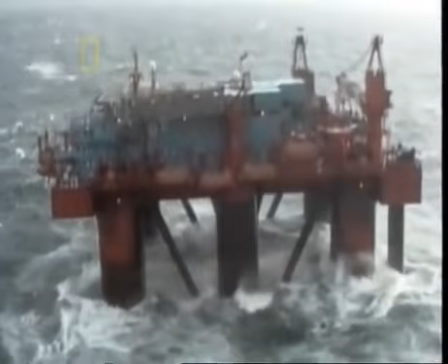Can massive oil rigs survive monster storms to find the fuel? And can mega shipyards build the new rigs fast enough to keep pace with exploding demand?

The world is desperate for energy. Every day we consume more than 80 million barrels of oil and more than 7 billion cubic meters of natural gas.

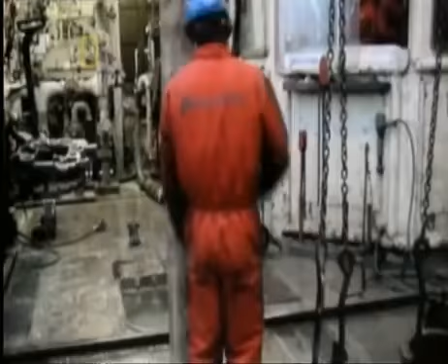But oil and gas are getting harder to find, and new discoveries are smaller than they used to be. It's a crisis, forcing energy companies to search in some of the most treacherous places on the planet.

Like the North Sea, a patch of rotten weather that lies between the British Isles and Scandinavia. For thousands of years, the North Sea has been feared for its storms. Here, 25-meter waves have been measured.

So drilling for oil or natural gas here is nearly impossible. But buried beneath the North Sea are 15 billion barrels of oil and 5 trillion cubic meters of natural gas, so it's worth any sacrifice to go after it.

And to get to those reserves, it takes a mega-structure oil rig. A rig like this one, the Noble Pete. This 9,700-ton monster can drill wells more than 7 kilometers beneath the sea floor.

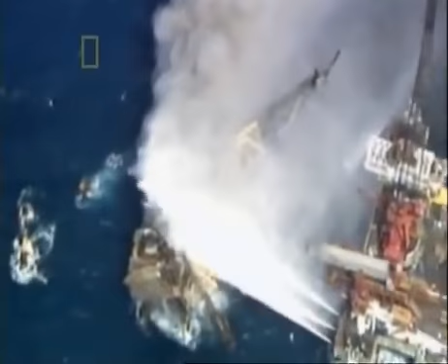Its heavily reinforced hull and legs are designed especially for harsh environments like this. Every bit of this armor is needed, because this corner of the Atlantic is literally a killer. Since 1980, more than 350 North Sea oil and gas workers have lost their lives.

Explosion and fire on the Piper platform. It's a grim statistic every rig worker knows. Like these guys, suiting up for their next 2-week shift.

They're in the town of Den Helder on the coast of the Netherlands, about to travel 150 kilometers over the frigid waters of the North Sea to work on the Noble Pete oil rig. And you thought you had a tough commute.

Rig workers have to wear state-of-the-art survival suits that retain body heat. A helicopter crash in winter would send them plunging into near-freezing water. Unprotected, they would be unconscious within 30 minutes and dead within an hour.

Helicopter accidents, though rare, are an occupational hazard. In the last 20 years, more than 60 rig workers have died when their choppers crashed into the North Sea. It's a hard fact to stomach, and they've got plenty of time to think about it.

The ride takes over an hour. But as the rig appears, like an island in the middle of the sea, thoughts turn to the hard work ahead. The Noble Pete is about to start a new mission, drilling to tap a reservoir of natural gas worth almost $350 million.

This oil rig is a specialized petroleum predator, perfectly adapted for its mission, to travel the oceans of the world and drill for precious oil and gas deposits buried miles below the sea floor.

Housed in a 45-meter tower known as a derrick, the drill digs a shaft to pockets of oil and gas trapped in layers of rock. But the drill needs everything else on the rig to support its work.

Up to 80 people are needed to run the operation, so there are 4 floors of living quarters. Below that, the steel hull is crammed with equipment, including 6 1,200-horsepower diesel engines that generate the juice to keep the drill running and the lights on 24/7.

The operation costs over $55,000 a day to run, so anytime the drill stops, they're hemorrhaging cash. That's why the rig and its workers are pushed to their limits.

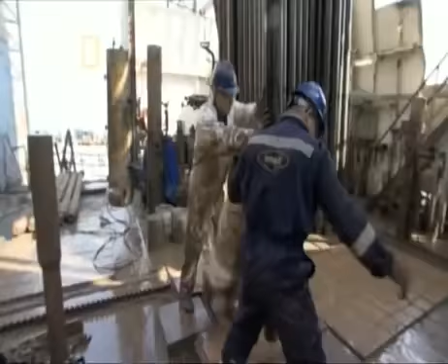Workers put in grueling 12-hour shifts for 2 weeks straight. Then they are helicoptered off the rig for 2 weeks of R&R. Every job here holds hidden dangers: crushed hands, broken bones, and even death.

The risks are high, but so is the money. Salaries up to $100,000 for 6 months' work. And that draws workers from all over: Lithuania, Malta, Portugal, Norway, France. 9 countries in all. They earn every penny.

Because this megastructure never stops working. But even if they strike the mother lode, it won't be enough. In fact, all the oil rigs working the oceans of the world, and there are more than 500 of them, can't satisfy global demand. So companies are racing to build more rigs as fast as possible. But building them calls for another kind of megastructure: the giant shipyards that can mass produce these maritime monsters.

One such shipyard is in Southeast Asia, near the western end of Singapore. Called the Keppel FELS Pioneer Shipyard, it's building more mega oil rigs than anywhere else in the world.

Some shipyards have just a few hundred workers, but here, 4,000 people report for work each day.

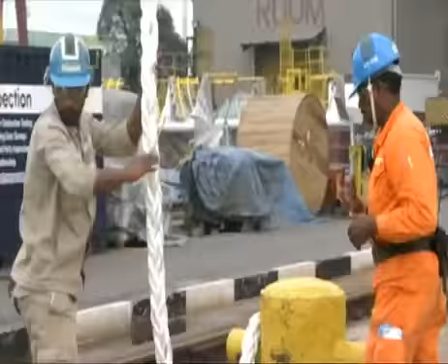It's as big as 38 football fields, stretching over 69 acres, and its only product is massive oil rigs. This gargantuan dry dock is as big as 24 Olympic swimming pools.

Right now, this Singapore-based company, Keppel FELS, is building almost half of all the world's new oil rigs. To hang on to their market share, they've got a bold strategy.

During the good times, we try to build as many rigs as we can. They know that when fuel prices skyrocket, they can sell as many of these as they can make. But they've got to build them fast before the market cools.

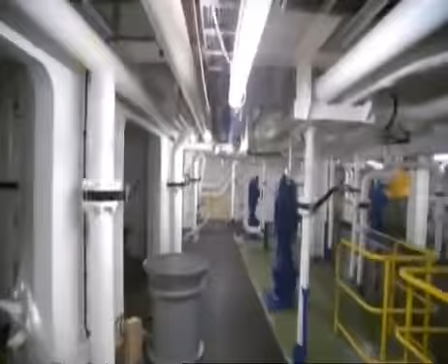A typical shipyard builds 1 or 2 rigs at a time, but this mega shipyard is designing, engineering and building an incredible 23 oil rigs at once. They cost between $130 and $450 million apiece, and the customers all want them yesterday. Multiply that by 23 rigs and you have literally billions of dollars worth of time and money pressure.

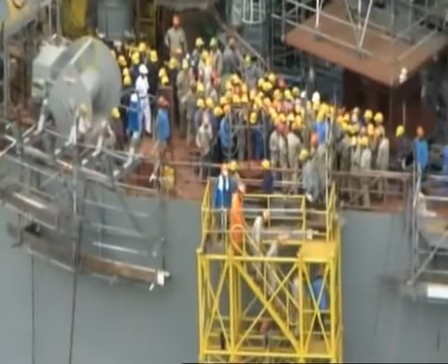One mistake that leads to disaster could cripple the company and delight their competitors. Shipyards from Mississippi to South Korea would love to snatch away Keppel FELS' business. They're the leader of the pack, so they have the most to lose.

But this Singaporean company has an edge: more than 35 years of experience building rigs in tropical heat and humidity.

Tropical heat also describes the way these rigs are made. When you're building 23 rigs at a fever pitch, any slip-up could shatter the production schedule. So the company has spent decades eliminating inefficiencies in their production methods.

We try to innovate our processes in construction and so on, so that we can build better, safer, cheaper, and faster. To speed up the process, they first build the entire rig in cyberspace. The engineering team works with a state-of-the-art marine architecture program.

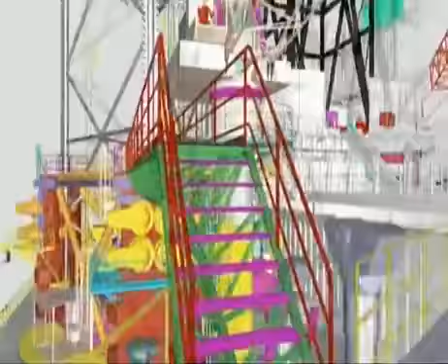This is the design for a new state-of-the-art oil rig: 69 meters long, with 158-meter legs and up to 5 decks of living quarters to house 112 men. It's one of an advanced, super-efficient new generation of rig. It will drill deeper and faster than the older rigs, but the design is still a work in progress.

The engineering team is inspecting their plan for an area below the derrick, and they've just caught a mistake: a pipe is running where a door will bash into it. It would be disastrous if they actually built it this way. Here, they fix it with a simple click of a mouse.

Once the team completes troubleshooting the design, computers will guide every phase of construction as they turn the design into a reality. That will take 18 months, if they manage to stay on their breakneck schedule.

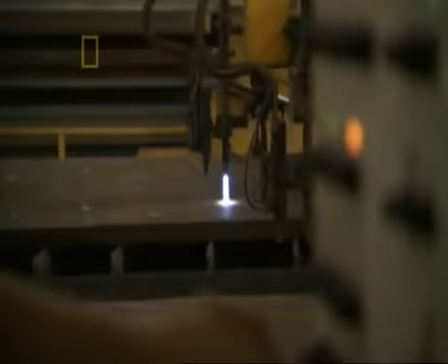First, steel plates are cut to precise size and shape. Each cut is controlled by a computer, using data from the design software. The software also helps generate the shop drawings workers use at every step of the building.

Constructing the rig is like putting together a jigsaw puzzle, except this puzzle is enormous. It's made from 25,000 pieces of steel, and 100 lives will depend on how well they fit together.

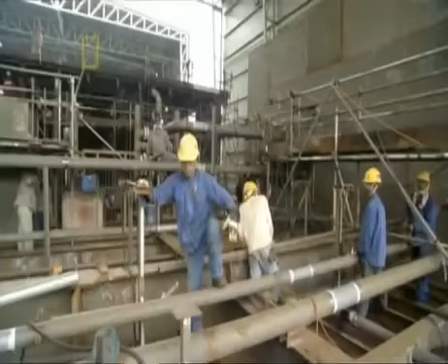Even with methods this efficient and 800 workers devoted to this one rig, it still takes 6 months to go from cutting individual steel plates to finishing huge sections of the rig.

This section is a part of the hull where giant pumps will be housed. It's as big as a locomotive, 20 meters long and more than 55 tons.

When huge sections of the rig are finished, they're moved to the dry dock, where they are stacked and welded one after another, until the rig starts to take on its final shape.

So far, construction is on schedule, but next comes the hard, tricky part: navigating it out of the dry dock and into open water. And this megastructure is still half a year from being finished and joining the worldwide fleet that's desperately drilling for oil and gas.

Back in the North Sea, the Noble Pete has been hired by a French gas company to drill a new well. But this time it must literally mount and drill through what's called a permanent platform.

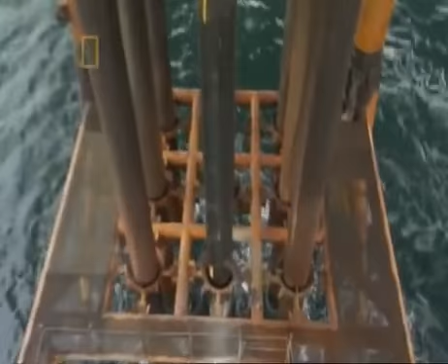This platform already has a number of working wells connected to pipelines sending the fuel to shore. But now it needs a new well, and it can't drill one on its own. That's why it needs a drilling rig like the Noble Pete.

Many rigs can't handle this job, but the Noble Pete can, because it can actually raise itself more than 7 stories above the sea.

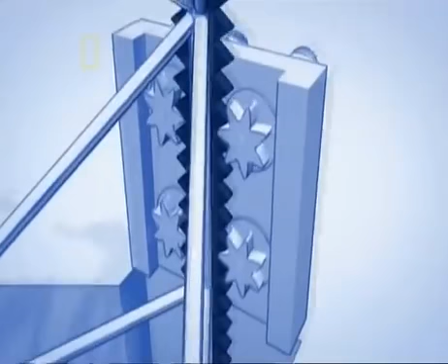Huge electric motors turn massive gears that lift the entire hull out of the water, jacking it up into the sky. Called jack-up rigs, they can position themselves over permanent platforms for drilling. It sounds easy, like jacking up a car, but lifting this massive rig is the equivalent of jacking up 7,000 cars, while balancing on stilts in the middle of the ocean.

Dutch barge engineer Paul Kroner has reason to be nervous. He's about to jack up the Noble Pete. Stand by for jacking. 36 electric motors, 12 on each leg, slowly turn the giant steel gears. To avoid a jam, rig workers slather grease where the gears will climb. One stuck gear could halt this mission before it even starts. Gradually, the rig begins to lift.

60 tense minutes later, the rig reaches its apex 26 meters above the water. But it's still not ready to drill. The Pete's drilling derrick needs to be slid out over the top of the permanent platform on a huge movable arm.

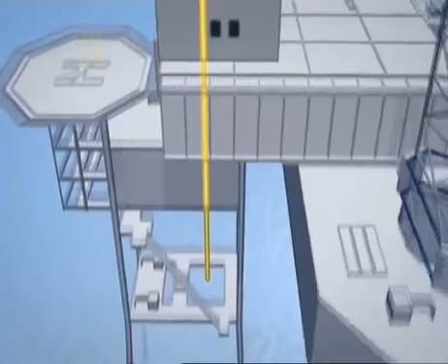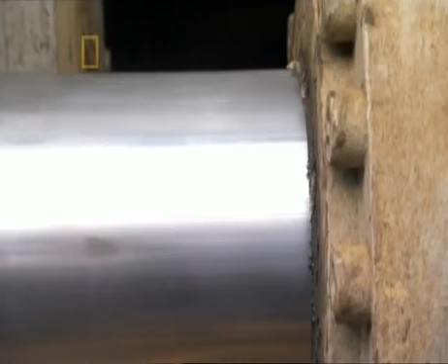Then the drill can be sent through a hole in the platform and down into the seabed. It's up to the Dutch drilling expert, Dennis Sellen, to execute this move. He activates 4 massive pistons that slowly begin pushing the 840-ton arm out over the permanent platform. Each piston is powerful enough to move 6 bulldozers, so powerful in fact that they all must be closely monitored. Going all right? Yeah, starboard side ready.

All 4 pistons must push together so the arm moves straight ahead. If one piston goes faster than the others, the arm would jump its track, bringing the operation to a dead halt. It takes more than an hour, but at last the arm is in position. And this megastructure is ready to drill a new well.

But even though scientists have told them where to drill, grinding through miles of rock to find a reservoir of natural gas will take at least 8 weeks, if they can find it at all. And the crew of the Noble Pete will have to stay on high alert as they drill, because accidents and death threaten every rig worker in the North Sea.

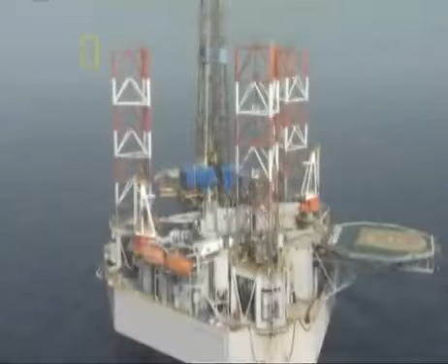When this megastructure oil rig in the North Sea isn't drilling, it's losing $55,000 a day. But even though it's in position to drill, drilling hasn't begun yet. That's because the Noble Pete's roughnecks, the workers who actually man the drill, must still haul more than 500 lengths of pipe from the main deck up to the derrick.

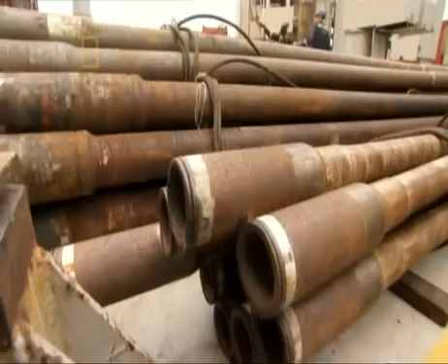This drilling pipe will get shoved into the earth a piece at a time for miles. Each section is 10 meters long and weighs almost half a ton. So this is a big job. It takes a winch and plenty of roughneck muscle to haul these pipes up into the derrick and onto the drill floor where the drilling takes place.

The drill floor is one of the most dangerous places aboard a rig, and it's drilling chief Tony Wiltshire's job to make sure that everyone stays alert and safe. Make sure that this valve is okay, because it's a safety valve we might need it in case of emergency. Here, a careless worker could find himself on the wrong end of a swinging pipe.

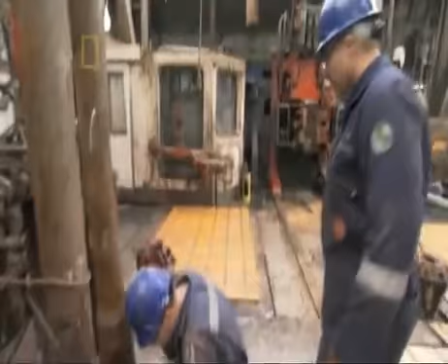Though Tony's concerned about safety, he's also worried about speed. In drilling, you always talk about economics: how faster it goes, how better it is. To work more efficiently, the roughnecks join 3 pipe segments together ahead of time and stack them in the corner of the drill floor. Once they've stacked them all, they're finally ready to drill.

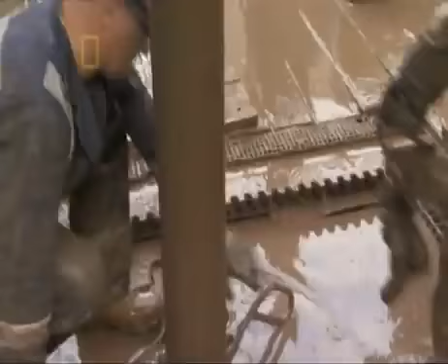Now it's time for this rig to start making money, they hope. There's no guarantee that this well will strike any oil or gas. In fact, in remote areas, half of all drilled wells strike nothing at all. To improve his odds, Tony's assembled a very experienced crew of roughnecks, led by Maltese driller Noel Shembry. But Tony's team has their work cut out for them.

The client, Gaz de France, thinks they've located a new reservoir of natural gas almost 3 miles beneath the sea floor. But to get to it, the crew will have to drill at an angle through 40 layers of rock. By adding or removing weight from the drill pipe, Noel can control the direction of the drill bit. Under such immense weight, even steel pipe becomes flexible. But Noel needs to be careful, because the rock is littered with high-pressure pockets of seawater.

If the drill nicks one, the high-pressure water could flood back up the hole with such force that it could destroy the well or even damage the rig itself. So Noel will have to thread the drill between these pockets like a needle, a needle that's miles away that he can't see. He has to trust his instruments and his equipment: a $30,000 diamond-tipped drill bit and a 1,000 horsepower engine capable of rotating almost 700 tons of pipe.

Noel sends the drill bit down the hole to the ocean floor. Soon it will start to chip away at the rock below, burrowing a shaft towards the gas reservoir. When one length of the pipe has been pushed down the hole, the roughnecks connect another. This process continues until, hopefully, they hit their target.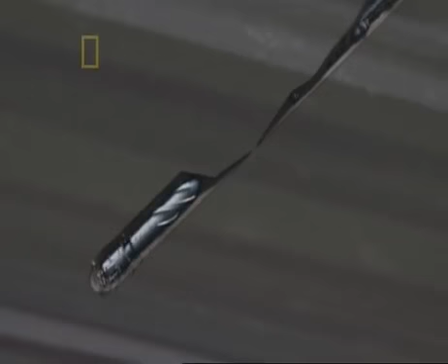It will take at least 8 weeks, if everything goes right, and the driller needs to keep a vigilant watch over his gauges the entire time. A pressure drop or change in drill speed could indicate impending disaster: a cave-in. During a cave-in, the walls of the hole collapse, destroying the well and trapping the drill bit thousands of meters below the surface. But drillers have an unlikely secret weapon to defend against cave-ins: mud.

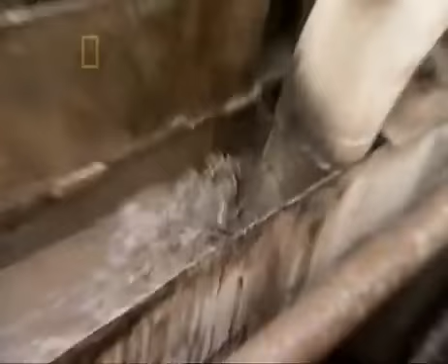On the drill floor, mud is everywhere. But this mud has no dirt in it, and it doesn't come from the sea floor. It's actually a sophisticated blend of chemicals pumped into the well to lubricate and cool the drill bit. The mud also performs another function: its weight pushes out against the walls of the hole, helping to prevent cave-ins. Every type of rock that the drill passes through may need a different mixture of mud. Use the wrong blend and you could ruin a drill bit or destroy the well itself.

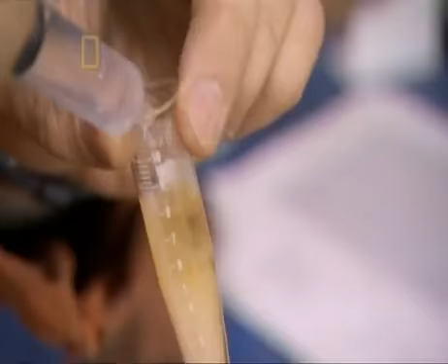So mud engineer Matthew Schofield can't afford mistakes. In his lab, deep within the bowels of the rig's hull, Matthew tests and retests his mud mixture until he finds the perfect recipe. Then roughnecks churn out more than 500,000 litres of the stuff, enough to fill 6 swimming pools.

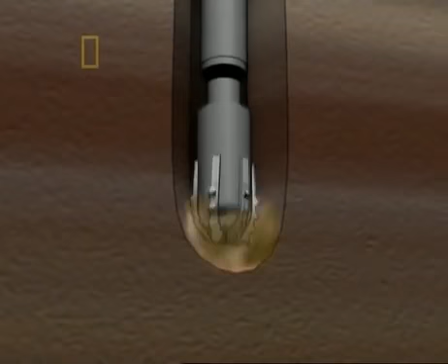Like the blood in your body, mud is pumped through an elaborate circulatory system in the oil rig. Three giant pumps in the rig's hull first push the mud up to the drill floor, then down through the drill pipe. When it reaches the bottom of the well, it spurts out through openings in the drill bit, floods the hole, and starts back up again, carrying with it bits of drilled rock called cuttings. When the mud and cuttings get to the top of the well, they are transported to 3 machines that separate the cuttings from the mud.

This high-tech mud is so expensive, almost every drop is reused. And current laws allow these cuttings to be dumped back into the sea. If they were using toxic oil-based mud, every bit of chipped rock would have to be shipped back to shore to avoid contamination of the environment. Energy companies used to dump these toxic rocks back into the sea, but now they're acting more responsibly. In fact, today around the world, only 5% of petroleum in the sea comes from oil exploration and extraction.

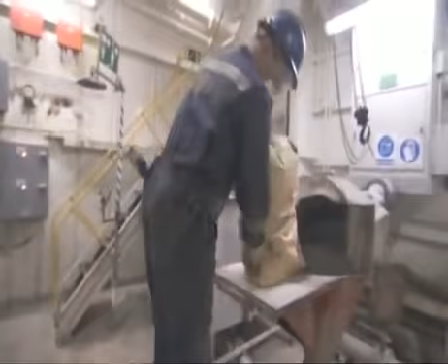The key to controlling pollution is having all parts of the mud system work together flawlessly. It's also the key to safety. If there's not enough mud in the well, when the drill actually hits natural gas, the explosive gas can rush up and ignite. It's every rig worker's nightmare: a blowout.

Right, so there she goes.

Explosion and fire on the Piper platform. In the summer of 1988, explosions ripped apart North Sea rig Piper Alpha and woke up the world to the dangers of offshore drilling.

A gas leak set off the first explosion, which was so horrific there was no time for an orderly evacuation. The platform is completely on fire from sea level to top. We have in fact 167 workers out of 225 were killed, mostly from toxic fumes. The official investigation found numerous violations of safety rules and led to many reforms.

The Piper Alpha was the worst, but by no means the last, disaster aboard an oil rig. So today, on a rig like the Noble Pete, the workers participate in a seemingly endless series of safety drills.

Attention all personnel, this is a drill. Today's simulation is that some scaffolding has collapsed. They've found one roughneck. He's been crushed. He's holding on to life by a thread.

Emergency control: more people may have been injured, so they need to account for everyone on board. In the mess, driller Noel Shembry and assistant driller Paul Brehabus are responsible for making sure everyone is present. Yes, this is lifeboat number 2 speaking. We have 15 people present, including myself. It's 7 p.m, so both the day and night crews are involved.

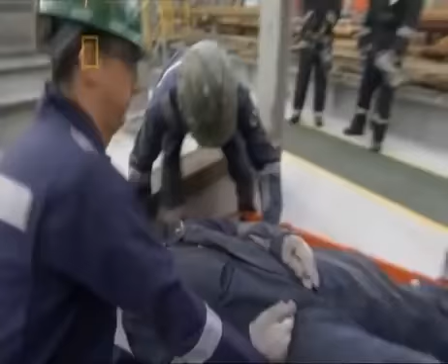This is just a drill, but they make it feel real. That way, if there's a real accident, they'll save precious minutes and maybe lives. We have ordered a helicopter to come and pick you up, okay? If they were really summoning a helicopter, it would take 45 minutes to get here and another 45 minutes to reach the nearest hospital in the Netherlands. That's not a comforting thought, but it's the reality of life on the rig.

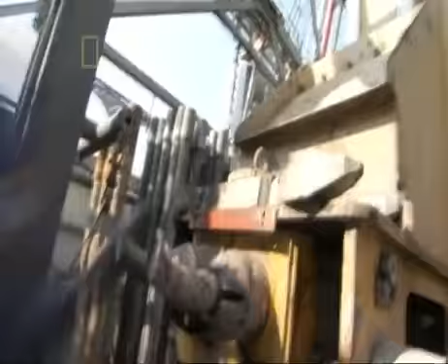Safety is always the number one concern, not just in the North Sea, but in the Singapore shipyard too, where they're battling the elements to move a new rig. In the North Sea, 150 kilometers off the coast of the Netherlands, the mega oil rig Noble Pete is racing to drill for gas miles below the frigid waters. It's dangerous work. Meanwhile, in Southeast Asia, on the island nation of Singapore, workers at the vast Keppel Fels shipyard are building the newest generation of mega rigs under super tight deadlines. It too is dangerous work, because a shipyard is an accident waiting to happen.

Workers perch perilously far above the ground. Welding torches spew ultraviolet rays that can sear an eyeball. Potentially lethal loads dangle overhead. To keep their workers from getting killed or injured, the shipyard devotes precious time to meetings where they pound safety messages into workers military style.

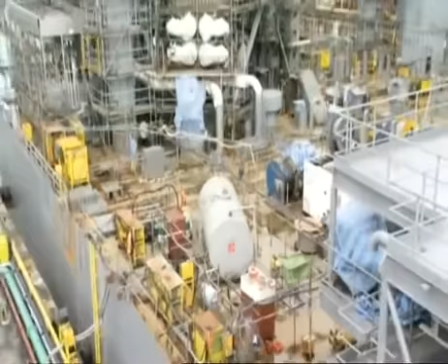The oil rig that's just been assembled in the dry dock is set to be towed out. It needs to be moved to a wharf a few hundred meters away, where workers will spend 6 months finishing it. But there's a problem. This rig is one of 3 mega rigs waiting to leave the dry dock, and 2 other rigs are blocking it. One's a jackup, and the other's a type of rig called a semi-submersible.

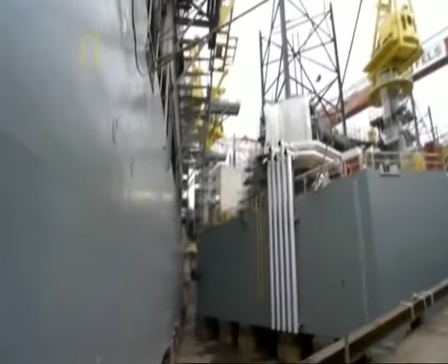In theory, it should be a simple maneuver: just flood the dry dock, float the rigs, then open the gate and tow them out one by one. In reality, the maneuver will be anything but simple. The process is incredibly complex, and they've scheduled just 2 days to move all 3 rigs. Not only that, the whole operation is fraught with danger.

The rigs are huge, and there's very little space between the vessels. But if they collide during the move, or hit the walls of the dry dock, it will be a disaster. We have to be very careful because any damage to the vessel or to the dock will cost us millions of dollars.

The process of removing the rigs from the dry dock is called undocking. They're under a severe deadline to undock these rigs right away, because dry dock space is the most precious real estate in the shipyard. To keep the rest of the operation on schedule, they need to clear this dry dock for the next round of rigs.

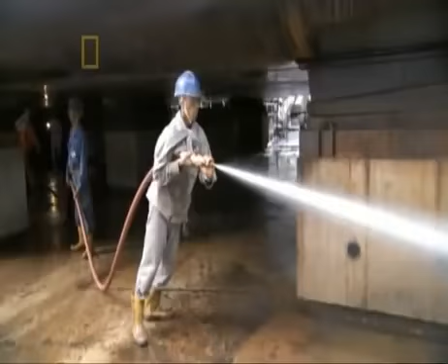But if they're not careful, undocking could pose a threat to the environment, because work on the hulls has left the dry dock littered with grit made of copper and steel. It's a real mess. If they don't scoop it all up, this metallic debris could end up polluting the Singapore Strait. By late morning, the workers finish the cleanup.

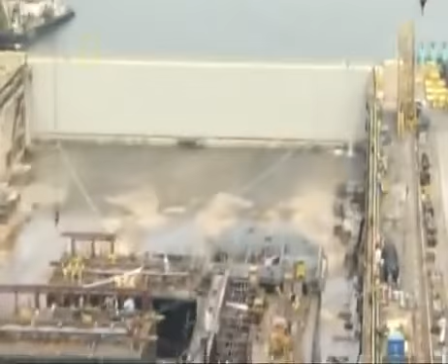They raise a red flag to show they're ready and open a valve to let the water in. It looks like more of a trickle than a gusher. At this rate, it will take all night to fill the dry dock, and the clock is ticking.

By the next morning, the water level inside the dry dock has reached only 26 feet. Not high enough. This unexpected delay is going to be costly, with a lot of waiting around on the clock.

Lim Yu Seng, known as Captain Lim, is in charge of the undocking. Meeting the deadline is his responsibility, and he knows undockings are always risky. It's not as easy as anybody could do it, you see. You need very special skill in order to maneuver it out without even her touching anything at all. We want her to move out very smoothly and gently.

But smoothly and gently will be too much to expect today. Lim's worried, the forecast is for wind and rain. If the storm hits, he'll have to call a halt to the undocking, and that could shred his tight schedule.

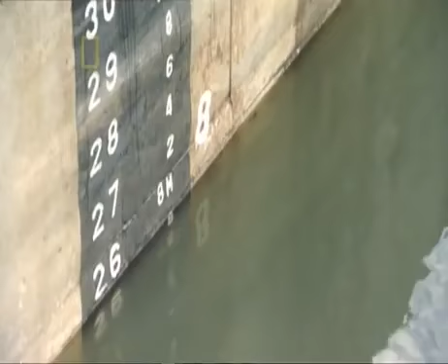3 tugboats are standing by because the rigs have no engines to propel themselves out of the dry dock. Captain Lim gives the order to open the gate. Slowly, almost imperceptibly, the gate begins to lower.

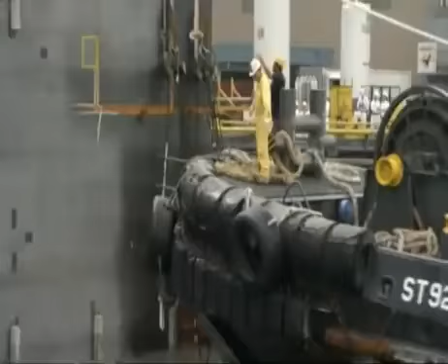Finally, the tugs start towing, and the huge semi-submersible rig begins creeping toward open water. But Captain Lim's luck doesn't hold. The weather gods are against him. He makes a tough call.

Close the gate. In order to prevent the semi and the 2 rigs in front from any sudden movements, we have no choice but to close back the dock gate again. And we will only resume our operations when the weather is back to normal.

It takes 2 hours for the squall to die down. When it does, Captain Lim seizes the moment. He orders the tugs to haul the rig out into the harbour. This rig is so massive, even these powerful tugs need time to build up speed. Finally, the rig clears the gate. That's 1 down, but there are still 2 more to go, and now it's late in the day.

They haul the second rig closer to the gate before the weather can change.

Once again, Captain Lim gives the go-ahead. The rig starts moving. With luck, the wind will stay calm long enough. It does. The second rig clears the gate and makes it out into open water. But it's too late in the day to move the third rig. They'll have to wait until morning.

The next day, the sea is rough and a strong wind is blowing. Captain Lim tries to put a positive spin on the situation: everything is going very smoothly except for the weather being a bit rough this morning. He knows he's behind schedule and can't delay any longer. In spite of the wind, he gives the go-ahead for the gate to be opened.

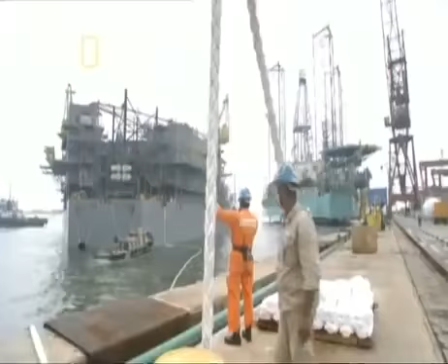The rig finally docks. Now it will need to stand on its own 3 legs while it's being completed. But the jack-up system has never been tested. If it fails, it will be a major setback.

The 36 jacking motors are started. For the first time ever, this jackup rises out of the water. The rig passes the test, but it's still not home free. It will take another 6 months of grueling work to finish construction.

After more than 2 hair-raising days, Captain Lim can breathe easy. He has moved all 3 rigs. The dry dock is ready for its next job. In spite of some close calls, he's kept his rig safe and the production line moving. But in the North Sea, however, the Noble Pete's mission is about to grind to a screeching halt.

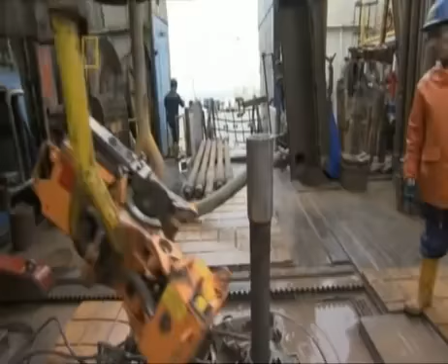Back in the North Sea, the drilling crew of the mega oil rig, the Noble Pete, has reached a depth of more than 3,000 meters below the sea floor. But now something's going wrong. They've only drilled 24 meters in the last 12 hours, 150 meters less than they'd expected. They must have hit some kind of snag, but the instruments aren't showing any problems.

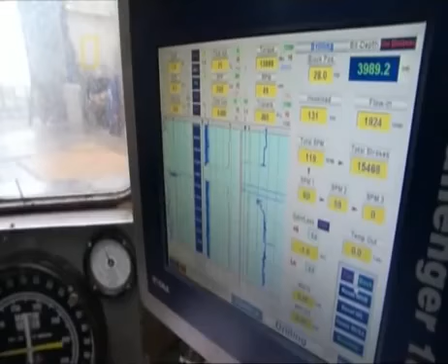The pressure in the well is stable and the drill bit's rotation is constant. So they have to look elsewhere for an explanation.

The first things they check are bits of drilled rock coming up from the well. Examining them shows what type of rock layer the drill is grinding through at this moment. Seeing hard rock, like granite or marble, would explain the slow progress. But under close inspection, Tom Branges only sees salt. The drill should be grinding through the salt 8 times faster than it's going.

Clearly, the problem is not in the material they're drilling through. This could be bad news.

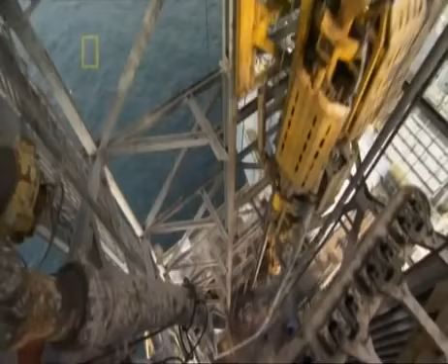Drilling Chief Tony Wiltshire wonders if the problem could be an undrillable well. But sometimes you have these wells, they don't want to be drilled. Sometimes the problems are so big they can't be solved, and then it's not economically worth doing, you know, the profit afterwards will be nothing.

If this well proves undrillable, they will have wasted 40 days and over $2 million. Tony knows that the only way to find the problem is to haul out and check all 3,000 meters of drill pipe.

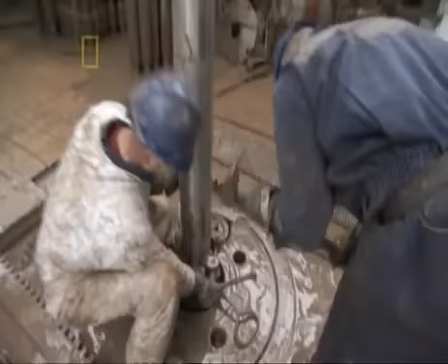This is the worst part of a roughneck's job. The pipe must be pulled up and each 30-meter section detached and stored in a corner of the drill floor. It's grueling, messy work, the drilling mud is everywhere. And one at a time, over 300 heavy pipe segments must come out of the sea.

The job is just too big for the roughnecks to handle by themselves. That's why Carl Gregg is perched 45 meters up in the derrick. He's using a robotic arm to grasp the top of each pipe and place it safely in a rack.

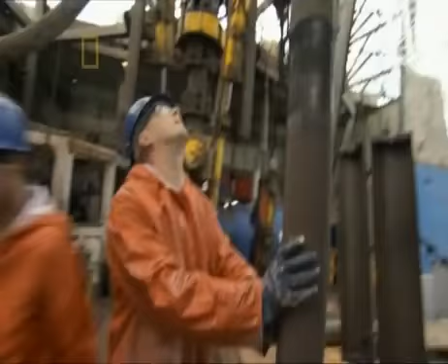But coordinating the move of a 30-meter pipe is risky, especially when the men grappling with the bottom end look like ants. Carl can't even see these men directly. He's totally dependent on a video monitor and hand signals. Even with this communication, it's a dangerous lift. If Carl opens these pincers too early, the pipe could fall on an unsuspecting worker.

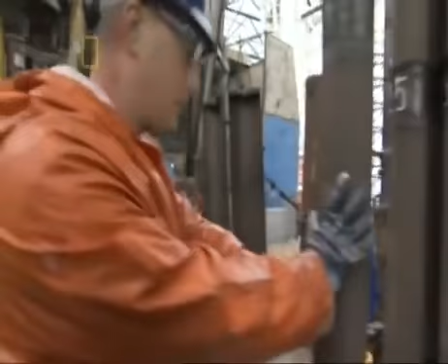It takes 8 hours to remove all the pipes from the hole, a massive effort that will be a total waste if Tony's inspection fails to reveal the problem.

But when the last pipe finally emerges, it's immediately clear what's been slowing their progress: a mangled drill bit. Inspection reveals that several of the diamond tip points broke off during drilling.

Spinning loose inside the well, these ultra-hard diamond tips ground into the drill bit, causing extensive damage. A lot of cutters lost, you know, here, there, all these cutters being lost.

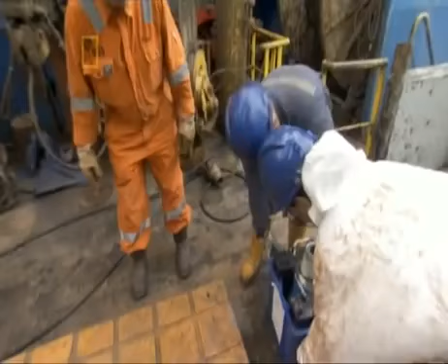The roughnecks grab another drill bit, one they hope will hold up, and attach it to the first pipe. Now they send the new bit back down into the hole, reconnecting all 300 pipes, one by one. It will take another 8 hours before the drill reaches the bottom. This should get the drilling moving forward again, but they've lost precious time.

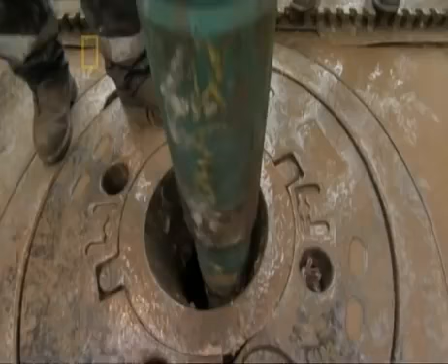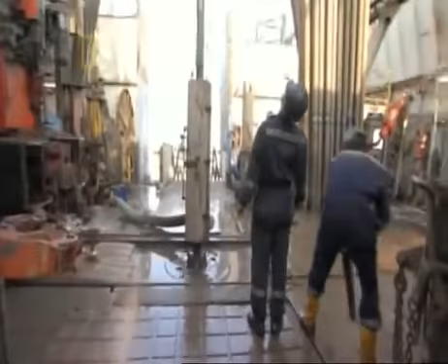It's been an exhausting day for assistant driller Paul Brehavus. When things aren't going well on the drill floor, roughnecks end up working twice as hard, and Paul spent 8 of the last 12 hours hauling out drill pipe. But at last his shift is over. If you work 12 hours and sleep 8, there's not much time left over for anything else. And if you're sweaty and grimy, your life's on hold till you get cleaned up. When you're as tired as Paul, an oil rig can seem like the world's biggest stairmaster.

Here's my apartment. Like almost everyone on board, Paul shares a cramped cabin. But cabin mates rarely see each other. Paul works the day shift, his cabin mate works nights. At mealtimes, people often don't have energy to talk. But at least the food's not bad.

After dinner, the roughnecks try as best they can to unwind. But here, it's tough to forget about the job. Inside, it's claustrophobic. Everywhere you go, there's a reminder that you're still at work. Even out on deck, a homesick roughneck can only stare at the ocean and hope that the time passes quickly.

So workers relax as best they can. Hitting the gym. Hanging out with friends. Even watching a G-rated kids movie.

Over time, the workers become like family. And like most families, there's only so much togetherness they can take. After 2 weeks, we are very glad we don't see each other for 2 weeks anymore. But there's a payoff. These 2 weeks of grueling work allow them to have 2 weeks of uninterrupted home time. I see my children go to school and that sort of things. And that's important for me. Not just weekends, huh? It's I'm 2 weeks off, but then after that I'm 2 weeks full-time daddy. And that's very nice. For the workers, it's a constant trade-off between great rewards and great risk.

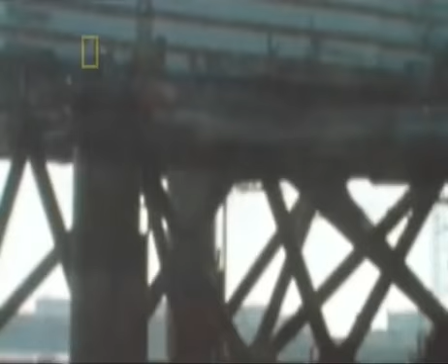After all, 3 spindly legs are the only thing protecting them from the frigid waters of the North Sea. On an oil rig, nothing is as important as the legs. The rig Alexander L. Kielland proved that when it collapsed in a North Sea storm in 1980. 123 workers died. The cause? A cracked leg. A single faulty part of a leg can lead to disaster. But it's a huge challenge to design and construct a leg that's tough enough to take extreme weather conditions.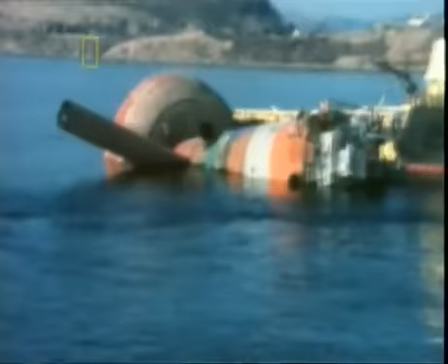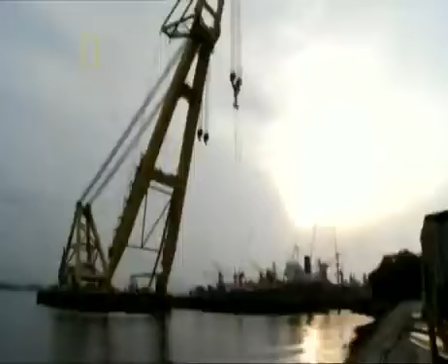This newly built leg section stands ready to be transported to its oil rig, which has just been undocked. It towers 34 meters high and weighs as much as 35 bull elephants. How do they move a structure this tall and this heavy to the rig? None of the shipyard cranes can handle the job, so they call in Hercules. Asian Hercules 2, that is. A 125-meter tall floating crane, one of the largest in the world. It's so powerful, it could lift more than a dozen leg sections at once.

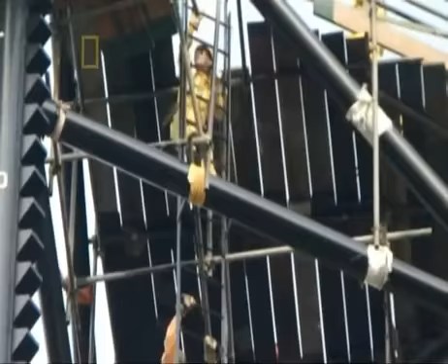But attaching the leg section to the crane is a huge job in itself. So they call in the Spider-Men. Workers use harnesses or scaffolding for protection when they're high above the ground. But these men are specially trained and climb the 30-meter ladder freely. Once they reach the platform high above the shipyard, the Spider-Men wrangle thick cables hanging from the crane and shackle them to each corner of the leg. Then it's back down to terra firma.

And we have liftoff. Dangling from the monster crane, the 34-meter leg section looks like a child's toy.

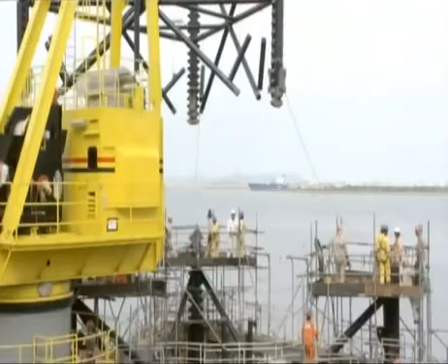As the crane approaches, a crew on board the oil rig rushes to prepare for the new leg section. Finally, contact, and the workers align the new leg section with the old. Now the two must be attached permanently with invulnerable welds. In the coming weeks, they'll keep adding sections until the legs tower 130 meters into the air. That's almost as tall as the Great Pyramid in Egypt. But it will take a lot more than just adding leg sections to finish this rig, and the deadline is looming.

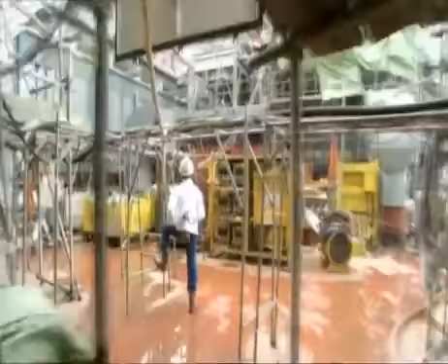At the shipyard in Singapore, there's only 5 months left till the deadline. The main deck of the new rig is a mess of steel and scaffolding, and below, crucial equipment and supplies have yet to be installed. There's a crushing amount of work to do, and there's a rookie in charge. This is Brian Lowe's first stint as project superintendent.

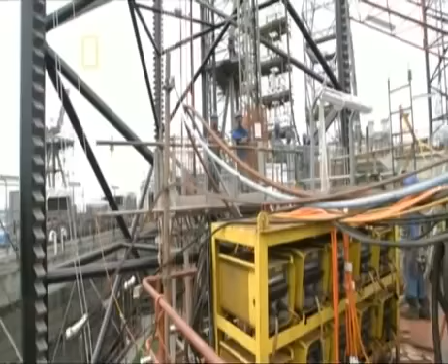Careful, start with the outside first. The superintendent has to oversee all the workers, watch out for any flaws, and make sure they get the rig completed in time. While in the dry dock, a workforce of more than 800 people was dedicated to this one rig, but the superintendent has been given only 300 workers to complete the job, and he's anxious about it.

We got to push our people. Our operation is 24 hours, you see, so sometimes our men are working late, we have night shift coming in. So, to be honest, I'm a bit worried as well, even during my sleep.

Managing a job this massive is nerve-wracking under the best conditions. Brian has to be everywhere at once. Okay, just hold on, so later I'll call Wilson Fong. You teach our people how to open the air damper, then you can run the engine. Just park the area. He's not sure his workers have enough time between now and the deadline to transform this raw steel box into a seagoing hotel for 122 people, and finish the mess room, which must feed more than 50 hungry rig workers at a time, with a kitchen worthy of a fine restaurant.

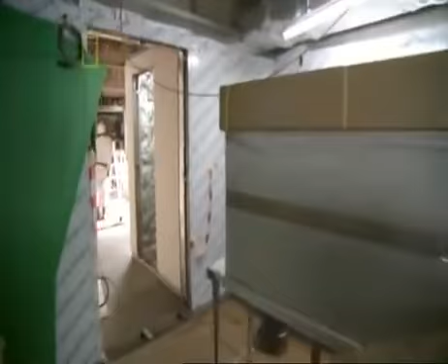And then there's the drill floor. It's still just a skeleton with the drilling machinery dangling in an empty derrick. But as long as there's oil down there, the frantic pace will not let up.

Back in the North Sea, on the Noble Pete oil rig, the drilling continues. The drill bit is now turning more than 3,500 meters beneath the rig, and the work has reached another critical point. The bit is nearing 2 pockets of extremely high-pressure salt water. If they pierce one, salt water will shoot up the hole, possibly destroying the well and exploding up at the rig.

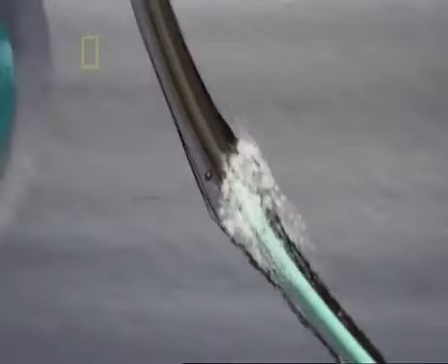Noel Shenbury has to guide his drill between these 2 danger zones. By adding or removing weight from the drill pipe, he can steer the drill bit at the bottom of the hole and change its course. But when the drill is more than 3 kilometers away, he's essentially navigating in the dark. His only guidance comes from a probe near the bit that transmits its location and direction.

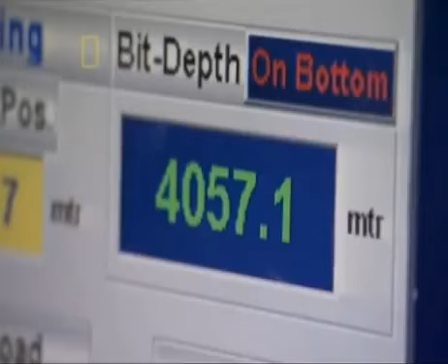But suddenly, Noel loses the probe signal. It flatlines. Yeah, we're getting nothing down here at the moment, so... Noel's team has no way to know how close the drill is to the dangerous high-pressure pockets. So they immediately halt drilling. They run tests, hoping that it's just a computer glitch. But there's still no signal.

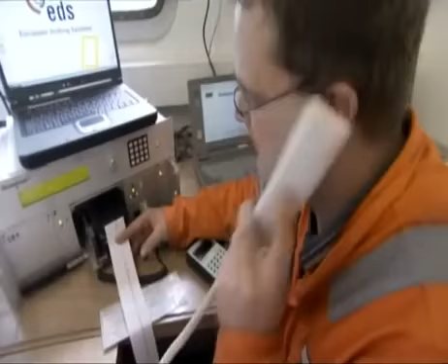You can see the pressure, when the pressure is going down. So the trouble isn't the software, it's the probe at the bottom of the hole 3,500 meters away. It's the tool that's not reacting. Incredibly, they have to haul the pipe back up out of the well, all 400 lengths, for the second time in 3 days.

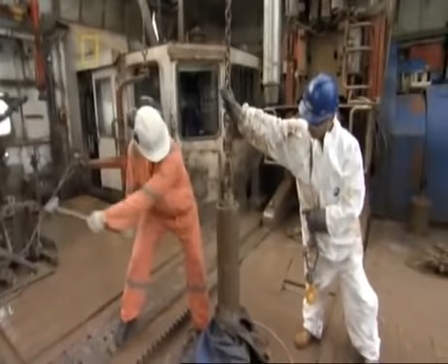8 long hours later, the last pipe, which holds the probe, surfaces. But the $700,000 probe is stuck inside. It's high-tech equipment, so they try to be gentle. But the probe won't budge. So they have no choice but to get serious with it. Just put tension on it. Right, finally, it's out, but there's no time to fix it.

Fortunately, there's a spare. 12 hours later, the drill, with a new probe, is back up and running at the bottom of the hole. And the probe is working. Its signal reveals that the drill is moving right between the danger zones, threading the needle perfectly.

So as long as we keep away from these two floating blocks, number 1 and number 2, we should actually carry on just to do the perfect job there. But they still have 300 meters to go before they reach their target. Luckily, the broken probe is their last obstacle.

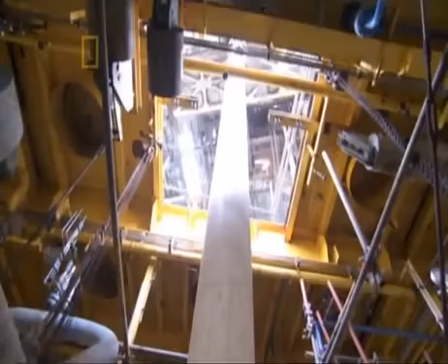Several days later, the Noble Pete strikes a reservoir of natural gas. It will take up to 2 weeks to retract the drill pipe and replace it with a concrete lining. Then the well will be connected to a pipeline leading to shore. The Noble Pete's mission will be complete. And it will be jacked down off the permanent platform and towed to its next assignment, somewhere else in the harsh North Sea.

Back in Singapore, after more than 2 years of constant deadline pressure, the new oil rig is finished on time and on budget. Its legs tower 150 meters above the water. Tugs are towing it out to sea. It's beginning a voyage to its first assignment off the western coast of Australia. When it gets there, it will jack up and go to work at a rate of up to $105,000 per day.

But the Singapore shipyard can't rest, not for a moment, because the world's thirst for oil and gas only grows, and it's forcing shipyards to build ever tougher and more efficient megastructures of the deep.